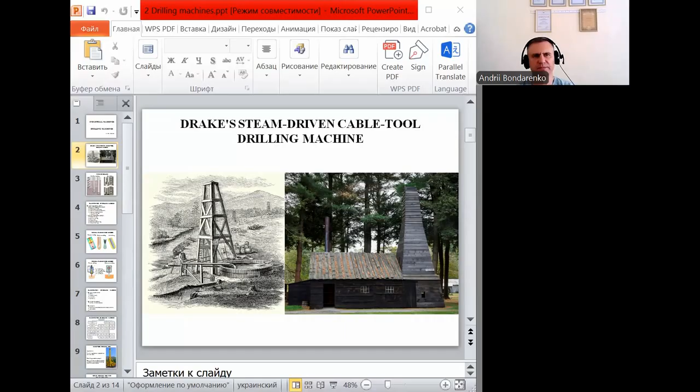Prior to the 19th century, wells were drilled manually or using animal power. Colonel Edwin Drake was the first to combine cable tool percussion drilling with a steam engine. Well drilling is widely utilized in mineral exploration as well as in extraction and construction production processes.

Full hole drilling is a method where the entire cross-section of the borehole bottom is continuously crushed and removed by a rotating drill bit under axial load, without extracting a core sample. Core drilling is a drilling method that uses a hollow cutting tool to extract a cylindrical sample of rock, soil, or concrete, known as a core, for geological analysis or structural testing.

A shothole is defined as an artificial cylindrical cavity in rock with a diameter of up to 75 millimeters and a depth of up to 9 meters. A borehole or well is defined as an artificial cylindrical cavity in rock with a diameter greater than 75 millimeters and a depth exceeding 9 meters.

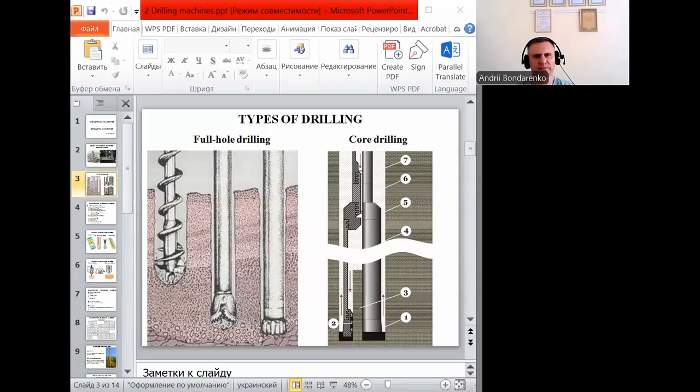Let us consider the general classification of modern drilling machines. Well drilling involves the application of both mechanical and physical rock fragmentation methods. In modern industrial production, mechanical fragmentation methods are widely utilized, including percussion drilling, rotary-percussion drilling, rotary drilling with roller cone bits, and rotary drilling with blade bits.

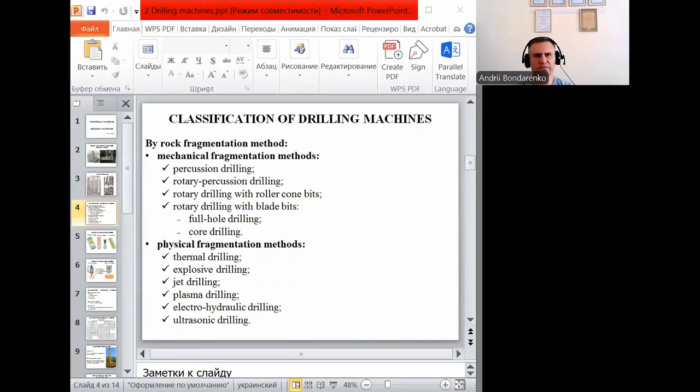Physical fragmentation methods are classified into thermal drilling, explosive drilling, jet drilling, plasma drilling, electrohydraulic drilling, and ultrasonic drilling. In thermal drilling, streams of liquid fuel combined with an oxidizer are directed onto the hard rock bottom, causing rapid heating and subsequent fragmentation of the rock.

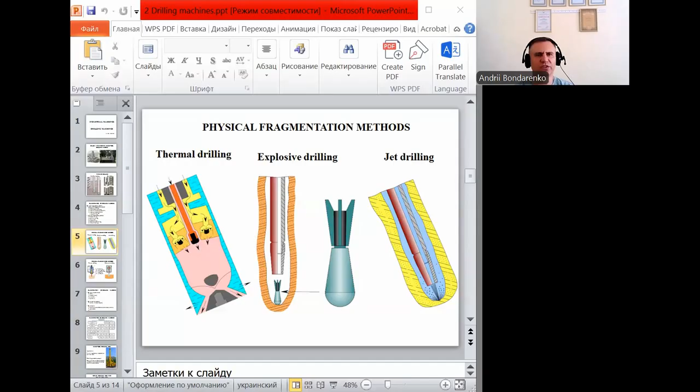In explosive drilling, the borehole bottom is subjected to successive multiple explosions to fragment the rock. In jet drilling or hydrojet drilling, the borehole bottom is subjected to high-pressure water jets. This method is primarily applied when drilling through sedimentary rocks. In plasma drilling, a generated plasma stream is directed onto the hard rock bottom, causing the rock formation to heat up and lose its mechanical strength.

In ultrasonic drilling, targeted ultrasonic waves are directed onto the rock bottom, accelerating the destruction of the rock mass. Among the physical fragmentation methods presented on these slides, drilling machines utilizing thermal and jet drilling are the most widely adopted.

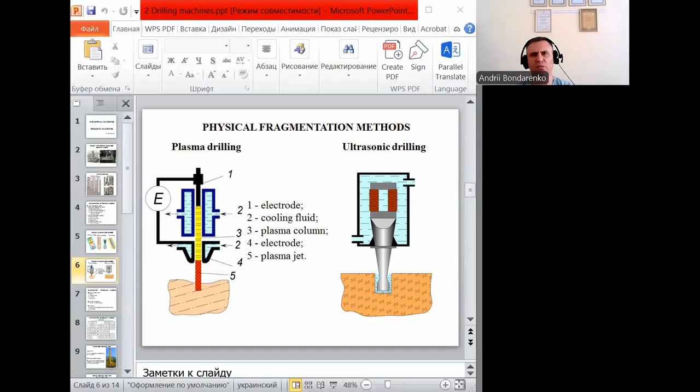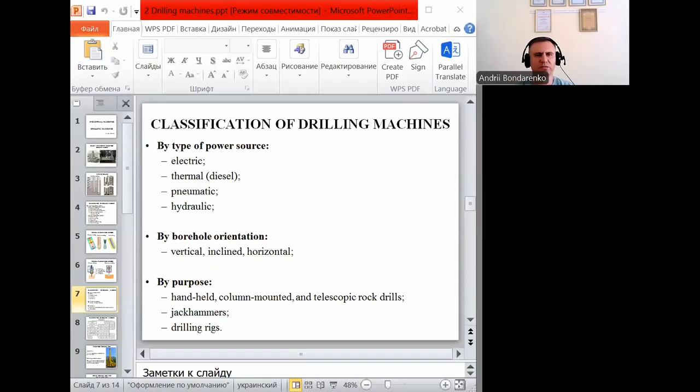Modern drilling machines widely employ electric, thermal, pneumatic, hydraulic, and combined drives in their operational processes. Modern drilling machines are capable of drilling vertical, inclined, and horizontal boreholes. By purpose, drilling machines are classified into handheld, column-mounted, and telescopic rock drills, jackhammers, and drilling rigs. The general classification of drilling machines is also presented on this slide. It provides a comprehensive analysis of modern drilling machines based on their key technical characteristics.

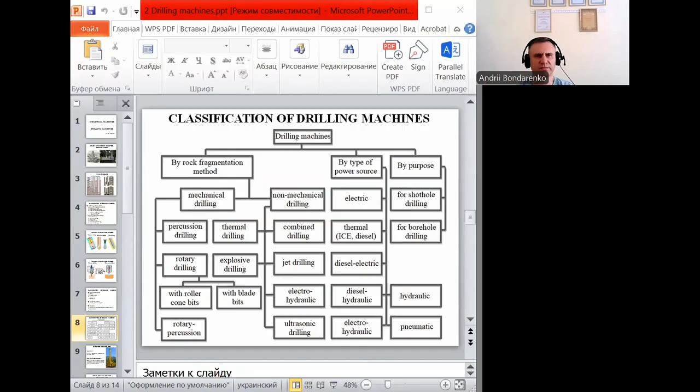For drilling operations in rock formations of various origins and strength, drilling rigs utilizing mechanical fragmentation methods are the most widely adopted, including cable tool drilling rigs, rotary drilling rigs with roller cone bits, rotary drilling rigs with blade bits, rotary-percussion drilling rigs, and thermomechanical drilling rigs.

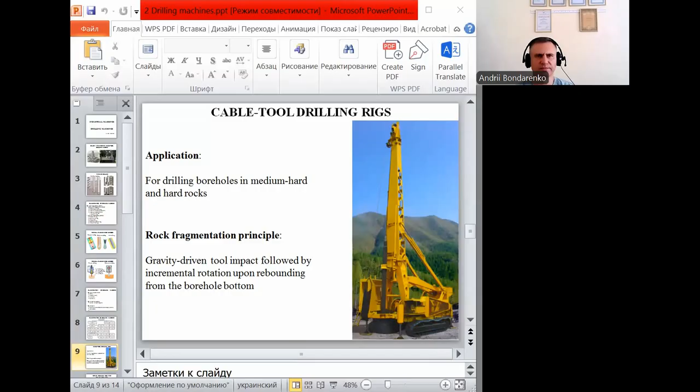The layout of a Ukrainian-manufactured rotary drilling rig with roller cone bits is presented on this slide. These rigs are engineered for drilling boreholes in medium to hard rock formations. Rock fragmentation principle for rotary drilling rigs with roller cone bits: the rock is fractured by the crushing and chipping action of the roller cone teeth as the bit rotates under an axial load against the borehole bottom.

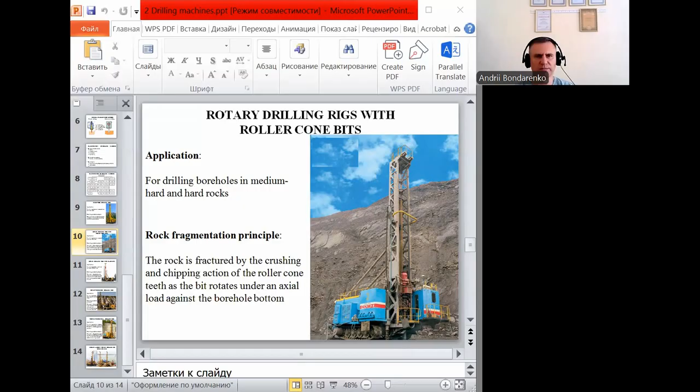This slide displays a modern rotary drilling rig equipped with blade bits, which is frequently utilized in construction operations. These rigs are engineered for drilling boreholes in soft formations, coal seams, and medium hard rocks. Rock fragmentation principle for rotary drilling rigs with blade bits: the rock is fragmented by the shearing and cutting action of the blades as the bit rotates under an axial load against the borehole bottom.

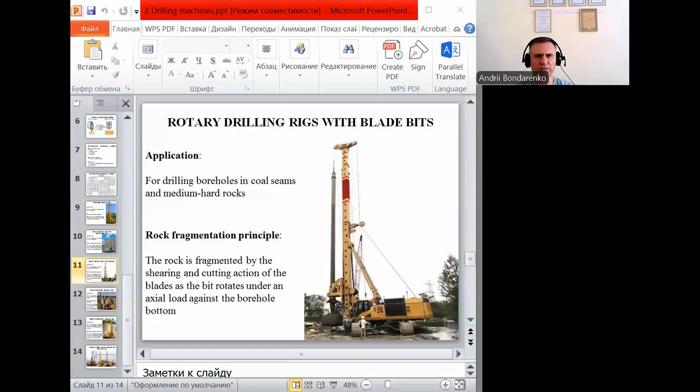The layout of a modern rotary-percussion drilling rig, commonly deployed for mining and civil engineering works in hard rock, is presented on this slide. These rigs are engineered for drilling boreholes in medium hard and hard rocks. Rock fragmentation principle for rotary-percussion drilling rigs: the rock is fractured by high-frequency impacts delivered to a continuously rotating bit under an axial load.

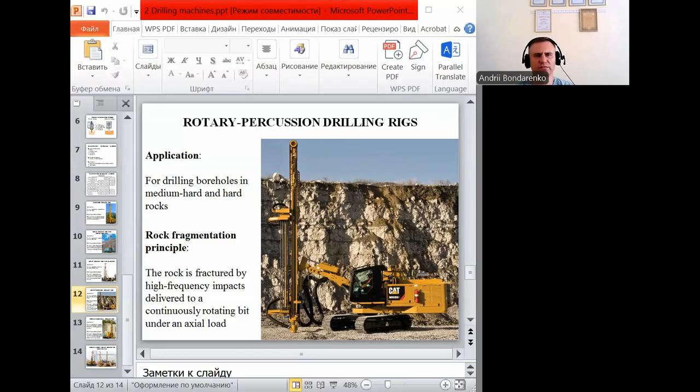This slide displays the view of a modern thermomechanical drilling rig. They are engineered for drilling boreholes in complex geological conditions, featuring highly variable formations of diverse hardness and structures. Rock fragmentation principle of thermomechanical drilling rigs: the rock is fragmented through the synergistic combination of thermal stress induced by jet heating and mechanical cutting or impact.

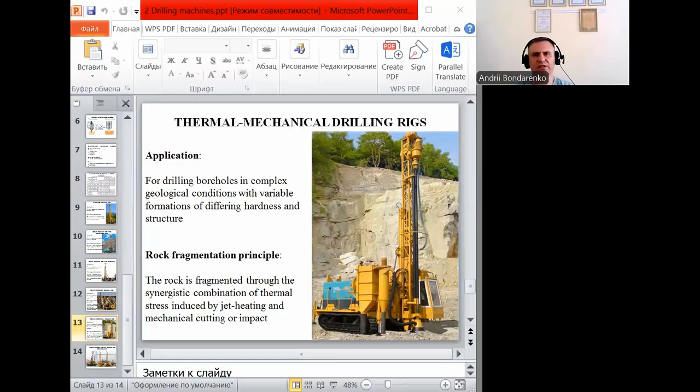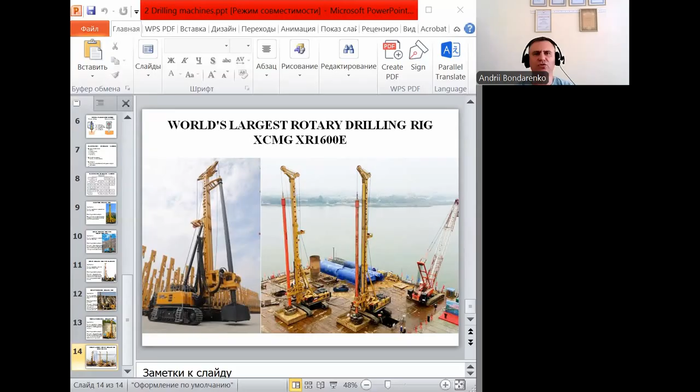The world's largest rotary drilling rig, designed for massive infrastructure projects, has a 520-ton weight and a 42-meter mast. It can drill holes up to 7.5 meters in diameter and 190 meters deep. And now let us watch how a rotary drilling rig with roller cone bits operates.